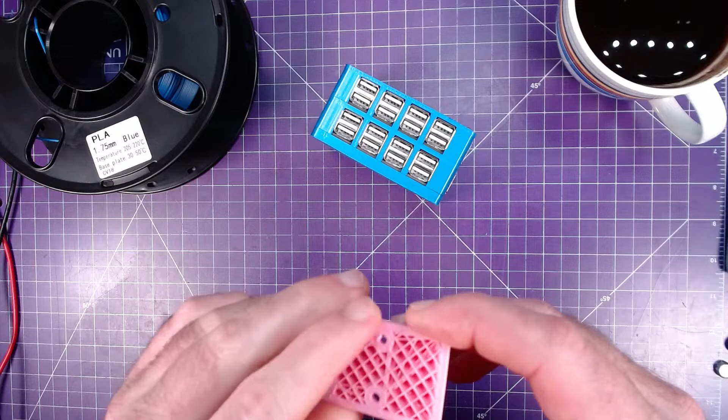So this is the kind of stuff I've been printing. This is a failed print. As you can see, it came off the bed a little bit, see a little ramp? But this kind of stuff—if you have a guess as to what it is, let me know. It is rock solid, can't break that.

Actually, I guess I could show you a completed print. So here's a completed print using this pink PLA.

Funny story, this pink PLA comes from an Amazon listing. I think it was $18 for a kilogram of pink and a kilogram of purple. I guess because, you know, 3D printing skews male. So I got four boxes of PLA, four kilograms of PLA, for under 40 bucks.

What's this, PLA purple? So this stuff and this color too—pink and purple. It's just now occurring to me that purple is kind of the channel color, so for something that's going to be featured on the channel so prominently in the future, I probably should have printed it in purple.

Well, now I'll know. Not tonight though—already released one video, haven't recorded any more. Oh yeah, tell me about not recording enough videos. That's been my life recently.

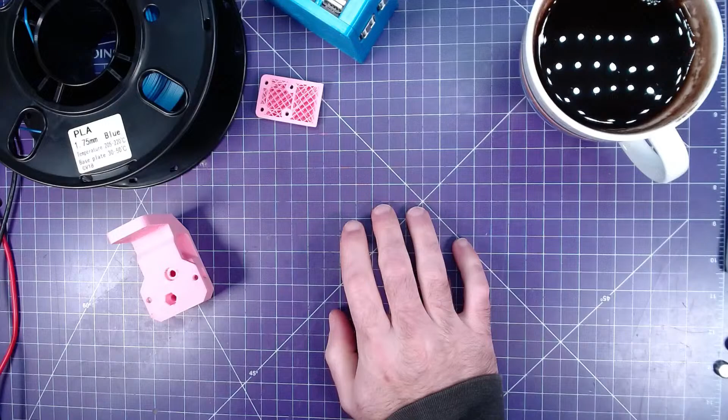I'm basically doing a lot of work for school. I'm getting some PCBWay videos done so I can pay mortgage, and doing podcasts because I have a self-imposed schedule every two weeks. So yeah, that's pretty much that.

I do want to show you guys something, I'm going to go upstairs for a moment. Let's see, hang on a second. Remember this from last time? Well, be right back, I'm going to put this here.

Working on a website—oh, very nice, I need to put more work into my website. Everyone's going to be able to hear me, but I'm just going to be upstairs grabbing something to show off a little bit. So, going up. Here we go, thankfully it's not far. I've been meaning to do a video on this for a little while, but I have not, quite obviously.

All right, we're back. So this is a Tupperware. Actually, I can probably demonstrate, except I'm not happy about one aspect—no, I won't demonstrate. Okay, so this is a battery maintainer that I designed, and by designed, you'll see how simple it is.

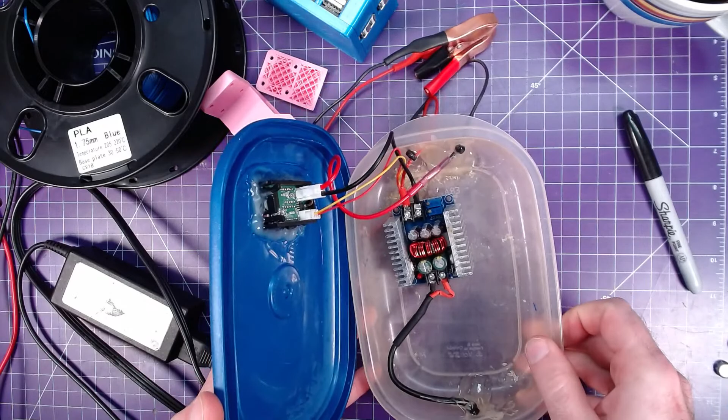I just have to be careful when I open this because I think there's wires connecting this to the rest of it. Yes, so here we go. So inside, all it is, is this DC to DC converter, and it's powered by a laptop charger.

Basically, you just have this one off-the-shelf volt and current meter, and this DC-DC converter, and I've set it to like 13.5 or 14.2 volts. You plug this into a lead-acid battery, plug this into the wall, and it maxes out, I think, at 2 amps. So it'll maintain your battery when it's like super cold outside.

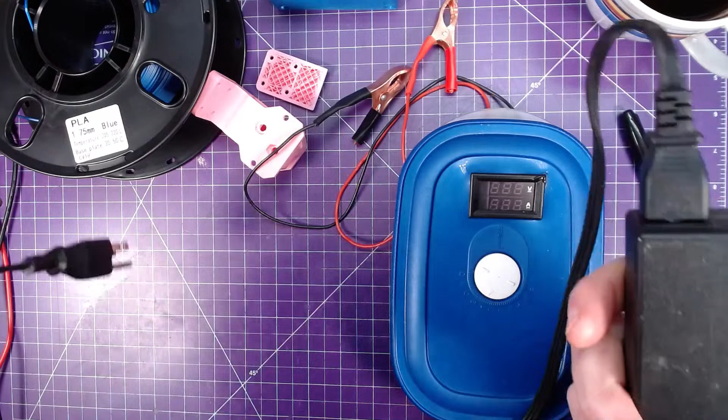But yeah, these laptop chargers—you pay very little money, they're already CSA approved and whatever. You could probably find one in the trash or on used markets like Facebook Marketplace or Kijiji fairly easily. Plug this into the wall, this gives you 19 volts at 3.42 amps, and this I've limited to, I think, 2 amps. Basically at 2 amps, you can leave a lead-acid battery on charge forever and it won't damage it.

So yeah, this is my solution.

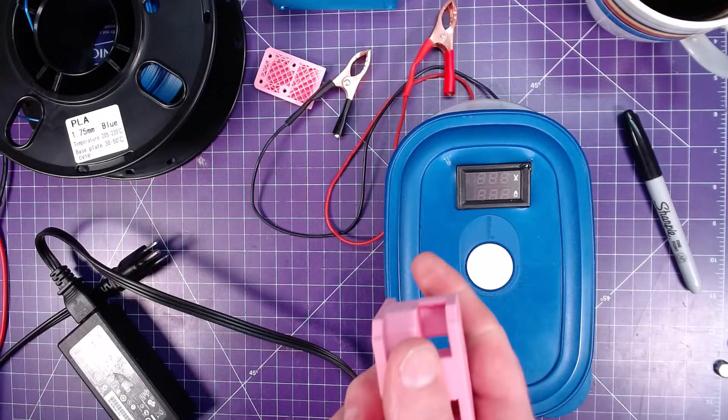Again, if you hear noises behind me, it's because I'm 3D printing stuff, and my most reliable 3D printer is also my loudest one. So it is what it is. Yeah, the case is not 3D printed. That's why I might do some CAD today to design the case. I also want to add a switch too.

I don't know if you know, but if you plug in a circuit that has capacitors—so here, you see there's these output capacitors here on this module—if you plug in a circuit with capacitors onto a lead-acid battery, it will spark. And an automotive lead-acid battery is not sealed.

In fact, let me go grab one and I'll show you what I mean. And the problem is if you discharge a lead-acid battery by using it. So like, let's say you have a parasitic discharge in your car, and that's why you need to charge it up with a battery maintainer. Well, you're creating hydrogen gas. There we go.

Typical car battery, this one's from my Civic a couple cars ago. But right here, there, and there are vents. And so if you plug this in, positive and negative, and it sparks—which it will if there's capacitors—then you can light any hydrogen gas that is venting.

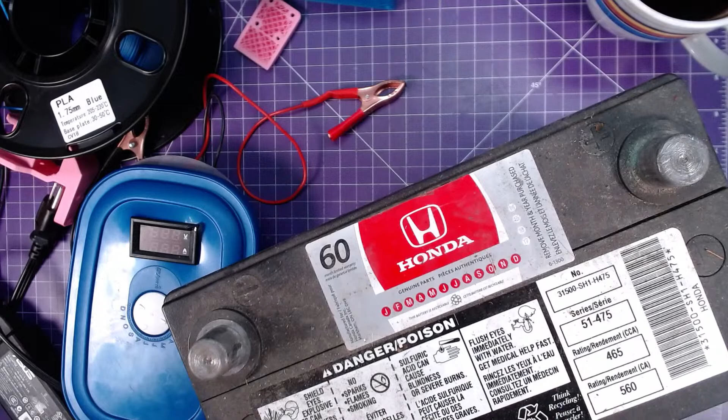I have a request triggered by my podcast. Sure, shoot your request, I'll listen and maybe I'll take it in notes, who knows. So everything that plugs into a lead-acid battery that has capacitors on it or outputs a current or whatever should have an on-off switch, and you should have to plug it in and then flip the switch. So that's another design improvement I need to do here.

Can you control a fuel injector using ESP32? Indeed, you can. In fact, ESP32 might be strong overkill. You could probably do it with really crap microcontrollers. You could probably do it with like a PIC, you know, an early PIC.

Hang on, I'll see if I have an injector here. Basically, a typical injector pulse is somewhere between 2 and 20 milliseconds. It's not particularly fast. Oh, and my box of goodies has moved. No, I won't be able to dig out a fuel injector right now. Unless it's over here. No. No digging out fuel injectors. But yes, you can definitely control a fuel injector.

Yeah, open. Yes, I am alive. I'm a little bit out of breath going up and down the stairs, but yes.

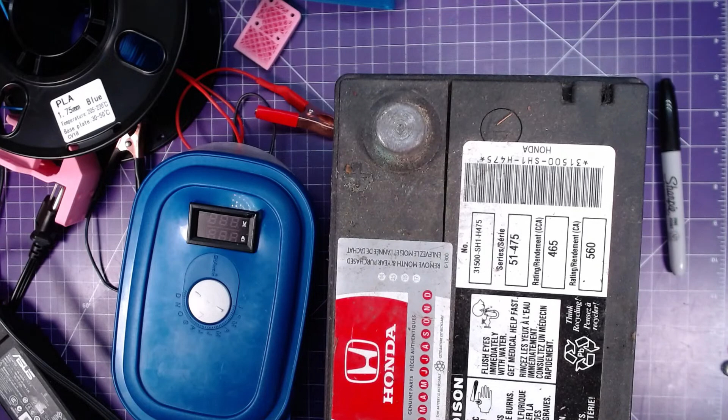Yeah, OpenSCAD is very like, you know, it's like you have to do math. I'm not an OpenSCAD guy. OpenSCAD is painful when you try something not trivial. Yeah, I agree. Yeah, you know, good on people for having OpenSCAD skills. That ain't me, that's definitely not me.

Did you release a video today, Vero? Everyone who doesn't know, Vero is my lovely wife, and she has released—she has a reaction channel.

You requested a topic in the podcast, and well, a fuel injector guide is my personal request. Oh, it's your week off. Okay, fair enough. I'm going to take note of that, how fuel injectors are controlled. The only problem is there are two different control schemes to a fuel injector, and I only really know how to do one of the two.

Like, the schemes are simple, but the programming is a bit more complex. One requires you just pulse the injector on. It's called saturation mode. You just pulse it on and you pulse it off. That's the way basic stuff works. But your injector needs a specific resistance, or you need to add a resistance in series with your injector.

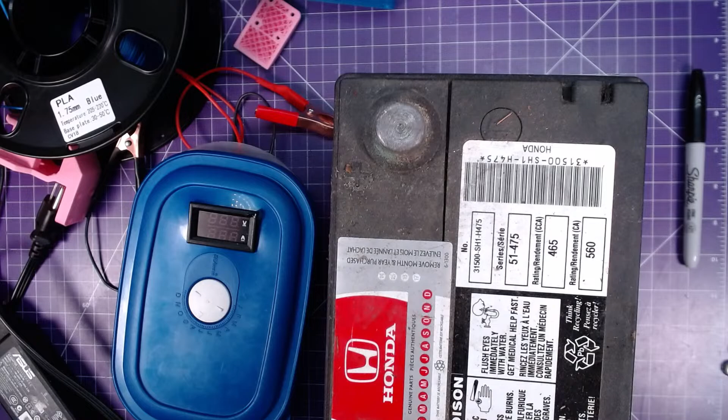So it's full of sawdust because it's in my dirty side shop. Give me a second here. And here.

So there's a carburetor, that's a very small carburetor. This is for a 3.3 cc engine. So a 3.3 milliliter, right?

Cubic centimeter. No, that doesn't make sense. Whatever, tiny little engine. So here's the throat that goes into the engine.

I need a black background, hang on a sec, to make the camera deal with the exposure. Like that.

No. No. How's it going, Franco? Is this blacker? That's pretty black, okay.

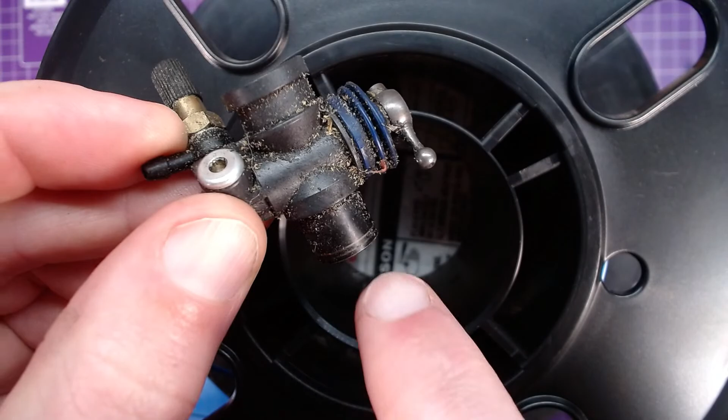So yeah, here's your carburetor. This is the engine side on that side. And this is where the air filter would sit on top here. Fuel comes into this pipe here, this guy right here.

And then here is the needle valve. I believe this one here, if you turn this whole assembly, that's just more fuel or less fuel. And then if you turn just the slotted part, that's to adjust more or less fuel at idle.

And if you look on the inside, if I slide this, that little cylinder comes out of the way, and there's a little needle inside there to feed the fuel. Very hard to see because the lights aren't lined up with the camera, but there you can see right through.

So there we go. So basically you just slide this open to allow more air, and the higher airspeed should suck more fuel into it too.

So in order to choke an engine to make it more rich, have more fuel, make it easier to start, you can just partially obscure the opening here and crank the engine, and because it can't suck so much out of this section, it'll just suck fuel directly through in here.

Because there's no fuel pump on this specific two-stroke, although most two-strokes do have a fuel pump, this one actually just uses exhaust gases run back into the fuel tank in order to push more fuel in.

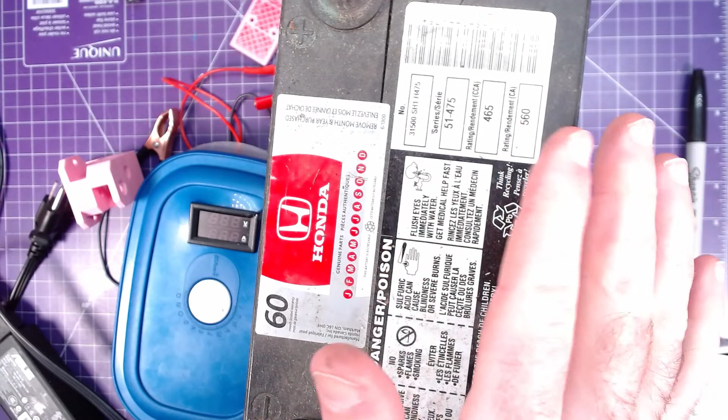But I want to convert it from carburetion to fuel injection, and I think it would be really cool. Instead of the point system, I would go completely electronic ignition, and then after that go electronic port fuel injection as well. That would be really cool.

Apparently, the only difference between my 9.5 horsepower and the next model up to 15 horsepower is the size of the carburetor. And so if you do fuel injection, then you can just increase the pulse width of the injector, and then you'll be doing the exact same thing as a carb. You'd be giving it more fuel, and then away it goes.

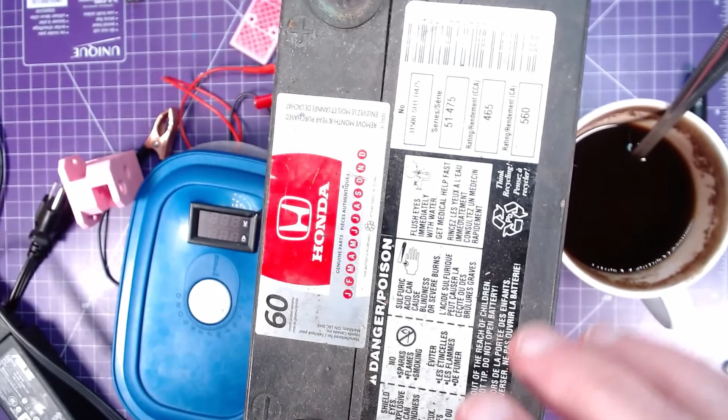Whoops, knocked the camera there. So yeah,

So this is one of the options we can do today. We can model an actual case for this prototype. We can talk about 3D printers and stuff, how mine bit the dust this week trying to print parts.

Look, the nozzle ate.

Let me see if I can show this properly. The nozzle dug a hole in the bed, and it's so bad that it went through the magnetic part. So the magnetic part on the bed needs to be replaced too now. I don't know if the aluminum is damaged underneath, but I hope not.

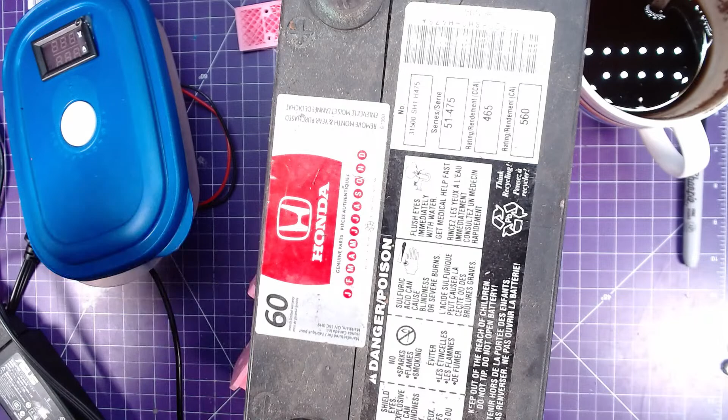A motorbike had a carb like that, 90 cc. Well, this carburetor is for a 3.3 cc. In fact, I might have the engine kicking around somewhere. Let me bring this back and I'll look for the engine while I'm there.

Oh, this battery must weigh about 40 pounds. It's pretty crazy when you realize a lead acid battery is literally filled with lead and acid. Mostly lead, by weight at least.

Let's see, where would I have put that engine? There, because I have a scrap engine, and one that's still in the RC car.

Not in here. These nitromethane engines are so picky that it's quite easy to blow them up. Plus, they rev super high. They must rev at, I don't know, 40,000 RPM, something like that. Nope.

One thing I miss is having an RC car, but I don't really want to spend money on the name brand RC cars. They're so expensive. Oh, here's the head. Well, I have the cooling head. I don't know about the rest, I feel like I may have thrown it away. I do have a different one.

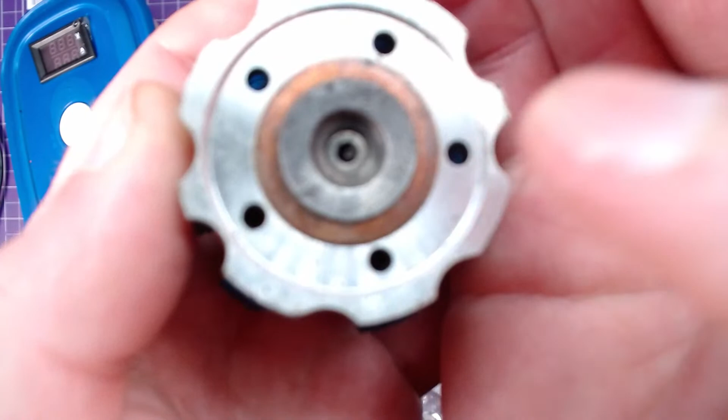Okay, so this is the cooling head from one of those 3.3 cc nitro engines. In the very middle there, you can see the glow plug. Maybe you can't because of the focus. Focus, there we go. In the very middle there, you can see a little filament that lights the nitromethane.

Here is the cylinder block and crankcase. I'm trying to think, maybe it's a 1.6 cc. I'm not sure. Maybe you can see a little piston in there, going up and down.

Here's the back portion. So there you can see the counterweight on the crankshaft and the connecting rod. That connecting rod connects to the piston. And then here is the cooling head for that one. No glow plug in this one.

So there we go, and then you've got the flywheel, which is relatively heavy. The flywheel would hook up, pretty sure, over here. Probably. I don't think it goes on the back, I think it goes in the front. This way? No, it can't be this way. It must be this way. Feels like something's missing in the middle here.

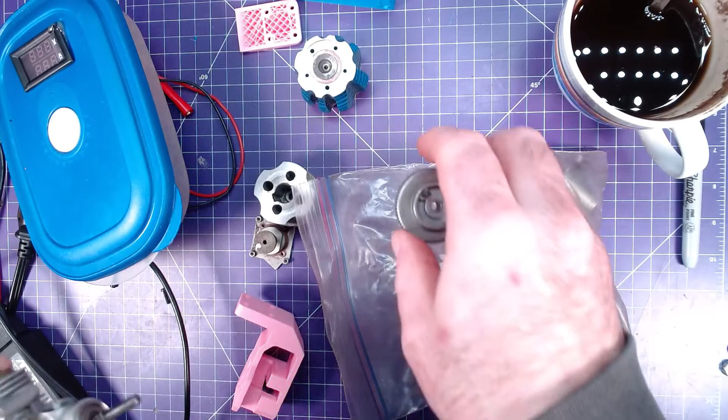Oh yeah, here's the other end of the crankshaft. So that little slot there hooks into the little end of the pin there. Sorry about the knocked camera. Focus, there we go. See a little pin at the end there. So that pin hooks up into this little spline here.

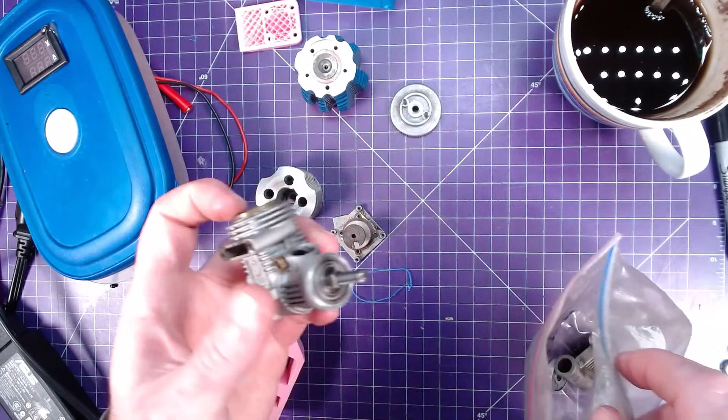I basically stopped playing with gas-powered RC cars because I just can't afford it. Everything is so expensive. There's the exhaust. It's just way too expensive a hobby. And they honestly don't run great. They don't have feedback, they're not like a car. When something goes wrong, the computer puts on a check engine light. Oh, there's a throat for the carb.

The engine doesn't throw up a check engine light and start running like a bag of poo where you can just limp it home, check the codes, and go after whatever sensor is freaking out or whatever the engine's doing mechanically. It's really like when it goes, it just blows up everything, and then you have to replace parts.

Like an ATV engine, the parts in that engine are roughly the same price as these nitromethane engines. A piston for this thing would probably cost like 60 some bucks, whereas you can get a nice aftermarket piston for an ATV for 60 some bucks. The cylinder head, this part here, is probably over 100 bucks. So it was just way too expensive.

It was lots of fun while it lasted, but I'm pretty sure the one that's in my RC truck right now is blown too, and it's just been years. It's just been sitting there because it's way too expensive to fix, and to buy a whole new engine is like $400 or $500. It's too much.

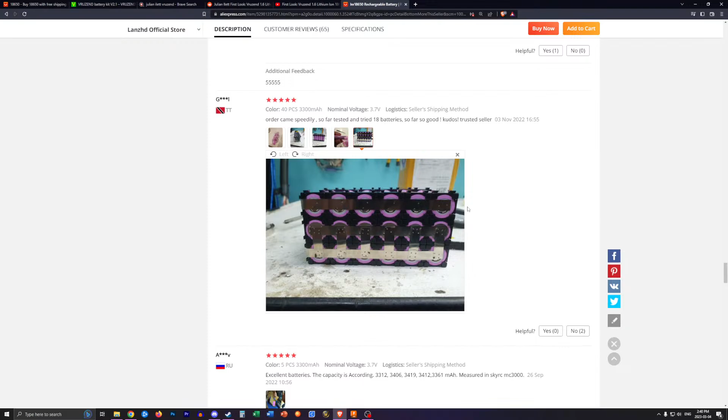What about balancing? Because everything's bolted together, I can get 3-cell BMSs and put them together, and you can unbolt the BMS and get, say, a 60-volt BMS—here, let me show you.

Let me show you, a 2000 watt motor, like this one here, VEVOR. There we go, a bigger one. Yeah, this guy—look, I can get a 48 volt, or I could get a 72 volt, depends on what I'm willing to spend.

I can reconfigure those 12 volt packs with relatively cheap battery management systems—just unbolt the BMS and bolt it to a 72 volt battery management system. So that's kind of what I'm saying: I can run a whole bunch of packs individually stacked here in the workspace, and then easily reconfigure them to be 72 volts or 48 volts, no matter what.

What's nice about that is the same cells can go with me. The other option is lithium iron phosphate batteries, which I am totally for. I wanted them, but the thing is they're only really a good deal in 100 or 200 amp hour configurations. And if I want 72 volts at 100 amp hours, that's going to be a massive, huge pack, and it's going to be so expensive - like $3,000. And I'm not looking to spend $3,000.

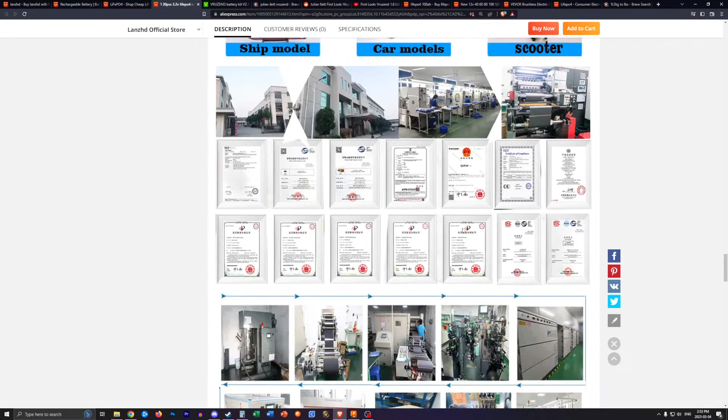All fine over there. Because yeah, this would be pretty neat, I'd be down with that. That'd be freaking dangerous to ship this though. Let's see how people got them. Nope, no feedback, nobody bought them. Or nobody - usually you can see how many were ordered. Let's see if anyone bought these. One order.

Yeah, these are fancy. Oh, okay, no damage - both banks 3.28 volts. So it's shipped in a plastic container with tape over the tabs. God, I wish I could reach out and ask them, but it's gonna be a big fat no for sure. 300 bucks. One day, you know.

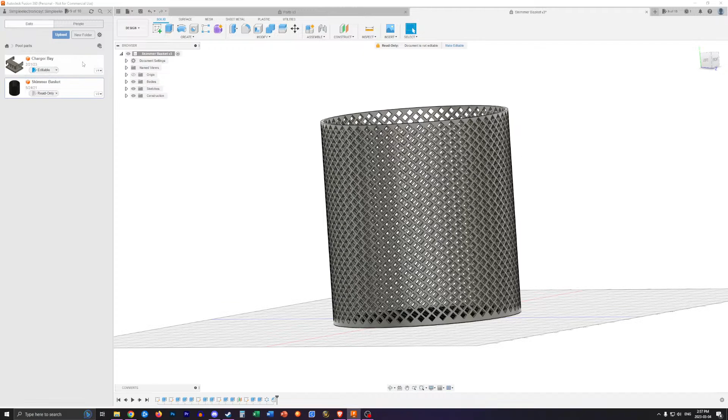Charger bay, is that separate? Yeah, midsection bottom. This is for the video that should be coming out tomorrow.

I actually don't know where I put all my stuff. Maybe it's gone. Maybe it's in the snow speeder. I don't know.

These are the new ski designs. Component 2 - oh, that was the old ski.

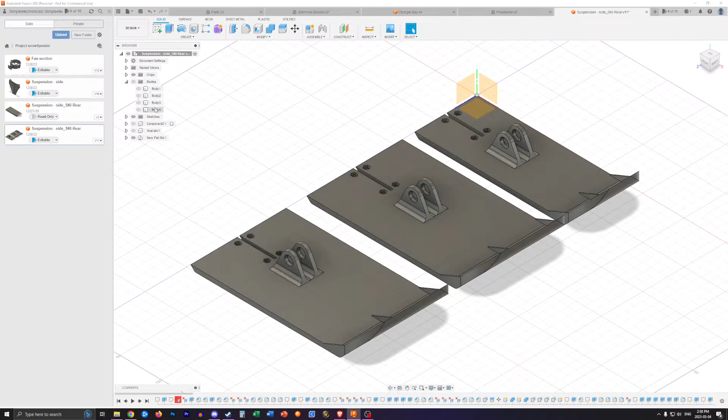Bodies. I have no idea. It'll be version 2? Version 2, I think.

This is where all my parts are for the snow speeder. Oh yeah, this is the giant duct that I made for a big motor, split in 4.

I don't actually know where all the stuff is. Oh.

Yep, this is all designed by me for 3D printing. Actually, here's a good question - where's my OpenRC project? Oh, I was looking down here. I have all these things. Whoopsies.

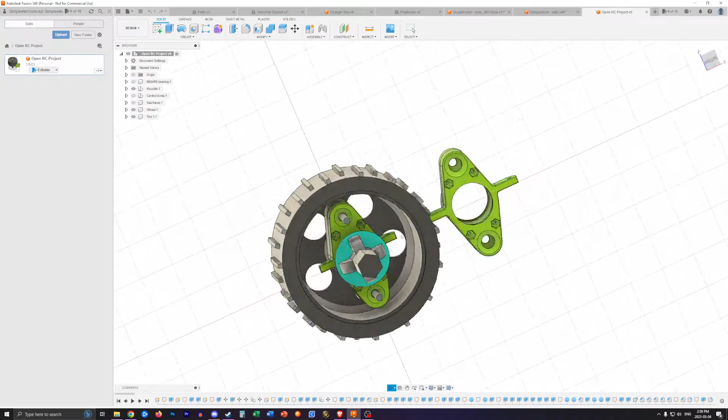OpenRC project is here. I think Thomas, you're pretty new here - this was my project to make a fully 3D printable RC car. Still working on it, mind you. It's not even close to being done.

It's editable, 2020 parts. I got a lot of stuff.

My LED - that's a PCBWay project that I haven't filmed yet. It's done, but it's not filmed.

Oh, does this not have anything? Oh, well, it's nothing. LED? LED's nuts. This is my humor.

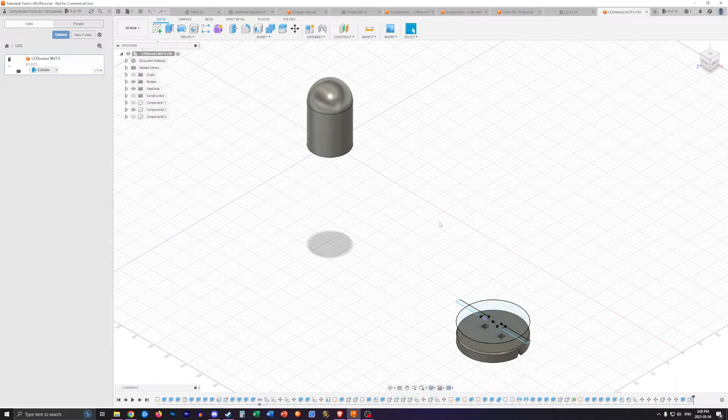Oh, actually, I disagree - Fusion 360 is actually fairly simple to use. I find this much easier than OpenSCAD. It's very, very visual.

Missing some bodies here. There's like the macro pad holder.

I don't know what the duct was. Well, that's definitely not a duct. This is for the banana box. That's not that.

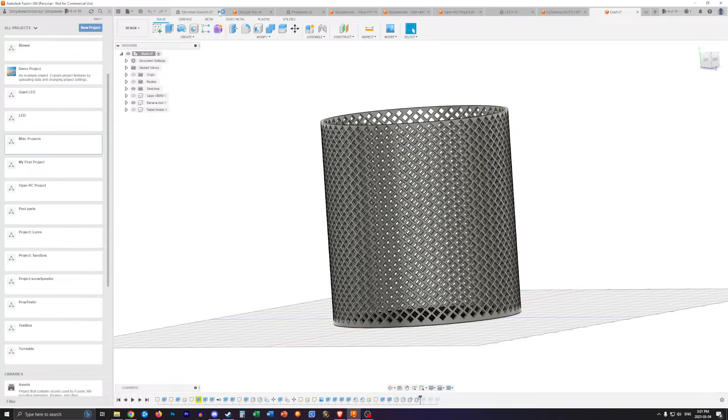Fusion 360 is free to use. I would highly recommend you download it and try it, but I find OpenSCAD very difficult. I find FreeCAD very difficult to use. I should probably install the latest FreeCAD and try it out.

I do want to switch away from Fusion 360 because it's bothering me that they just keep updating everything, and every update they just remove a little bit more functionality. FreeCAD is the opposite - they're constantly adding stuff in, so I should probably just install the latest FreeCAD.

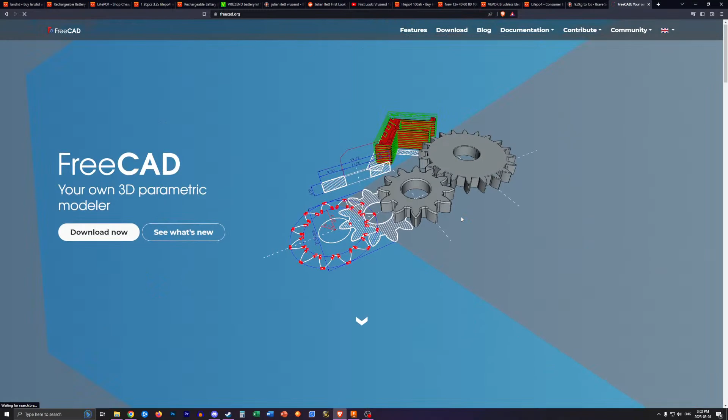Yeah, FreeCAD is much harder. In fact, I'm going to try it right now. I'm going to flip you guys to the webcam so you can take a look at other things while I install FreeCAD.

The moment that FreeCAD has me make an account, though, I'm out. The whole reason is so that I don't have to make accounts.

Well, let's see if we can figure it out. The thing with FreeCAD is their social media presence is pretty strong. I think you could just complain to them on social media, and they're gonna be like, 'Oh, you can suggest stuff.' They're still in freaking beta.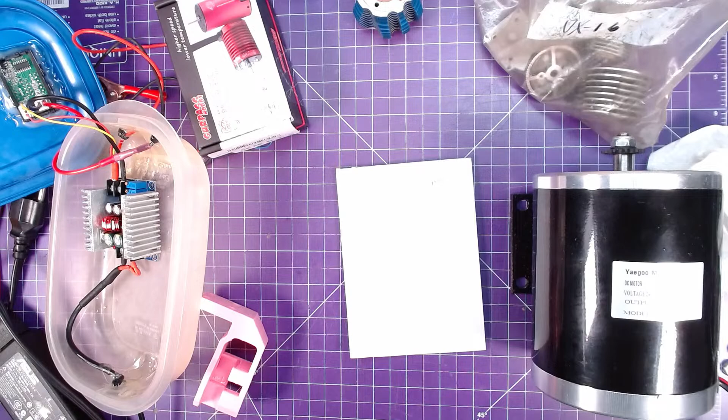All right, so what was it? Power and regulators. In the power/regulators bin.

Oh, what kind of dog do you have, Adam?

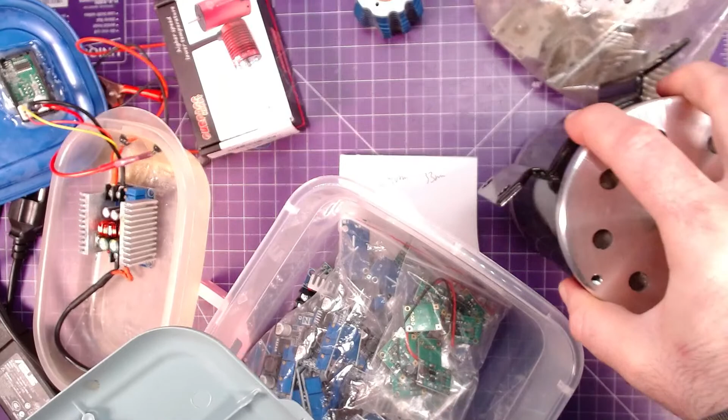A bracket for that big electric motor. Well, it has a bracket - see, down there. What I would need is to adapt it to a bracket to fit my outboard. I don't have my outboard in the house, and it just snowed 20 centimeters, so I'm not going outside today. I'm gonna go shovel when the whole crap show is over tomorrow. So I like your thinking, but I'm not going outside today to pick up the motor. Although it would be funny for you guys listening to my struggle.

Which view to start? It's not Blender, but it comes close. Yeah, I get you. I need to do a tutorial series. I did a tutorial series on KiCad, but I can do another one. And I do need to learn FreeCAD enough to do a tutorial.

Okay, so what do we have for width? So it will be 45.3. So that is not part of this. So 45.3 by... oops, that was already this. So it's not 45.3. Oh, it is. What's going on here? Yeah, 45.3. And this side. Tough part is lining it up by 60.

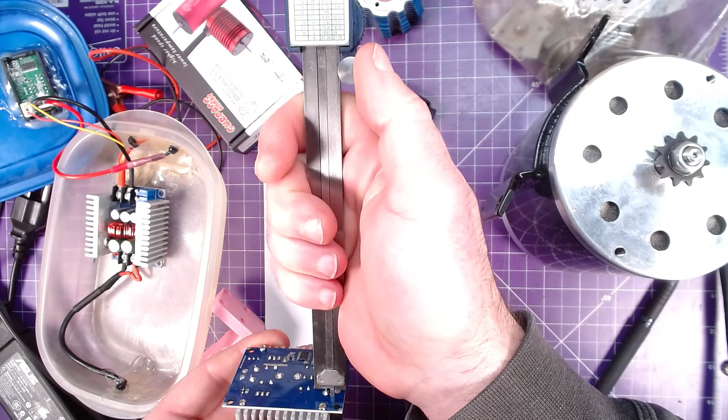Okay, so that's for the base. I need it a depth to clear the components, somewhere around 2 mils, probably more. Let's see, about 3 mils. Then about, let's go 4 mils. Give it some breathing space down there.

And then what we need, our overall case needs to be bigger. So at least 53, and then room for the cords. So let's say 75. So let's go 55 by 75.

And then we need the overall height. If we add those 3 mils, probably we need enough space to clear it. Let's give it a good, go 50 mils. Oops, 50 millimeters, there we go. So let's try that, try to build a case for this.

We can do center to center bolt pattern here: 330. So 50 mils plus 3.3, so that's 53.3 by 36.56, and that'll be the hole sizes. Oh, and then 3.3 holes. All right, that should be enough basic measurements to get us started.

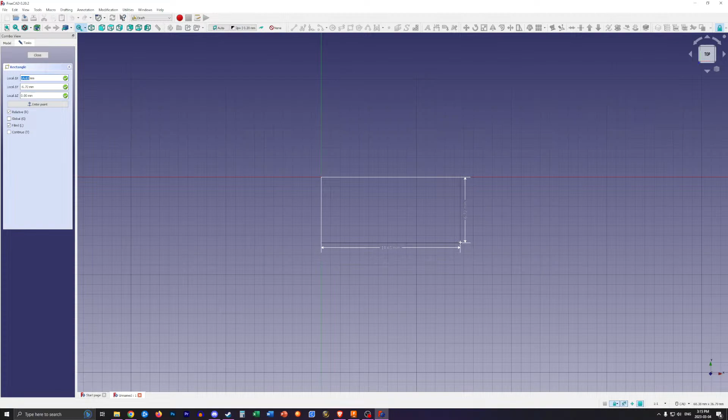Okay, so let's snap to dimensions, probably. Snap dimensions, okay, let's try that. All right, so make a rectangle, snap to the origin. Okay, I like it, so 57 by 77. And now, no, it's not snapping. 57 by 77, enter. No. Okay, how about if we finish it and then we edit it?

Rectangle, yeah? Yes, there's a rectangle. Height 57, right? 57 by 77. I don't know what the hell happened there. Why is this so big? Okay, whatever had snapped doesn't snap anymore. Can you move this?

Had to provide the wrong measurements this week for a stair lift. Who in their sane mind doesn't use metric standard for measurements in the UK?

Yeah, construction here is very much standard as well, imperial, I should say.

Okay, why? What is going on? Okay, well, anyway, didn't I snap to origin? I thought it snapped to the grid. Is this on the origin? That's not even, that's not anywhere.

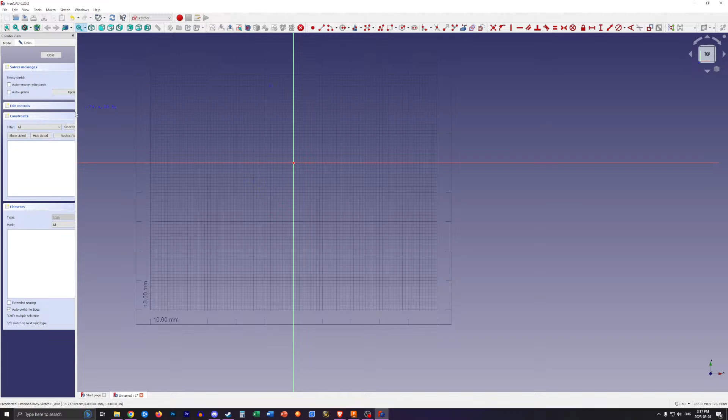It's getting warm now, it's getting warmer. All right, snap this to the origin, right? Do we have snapping again? So now my question is, why wouldn't I have the same snapping options when I'm working on a sketch?

Why, Windows? No. Constraints? Not constraints, I want snapping. Tools. Okay. I found the snapping in one workspace, but there's no snapping in this other workspace.

I just go there? Okay. Can I tab? Oh, come on. Really? Okay, so I've got these. Can I? What is going on here?

Can I edit this? Edit. Okay. Normal. Good. Length constraint. Okay, all right, here we go.

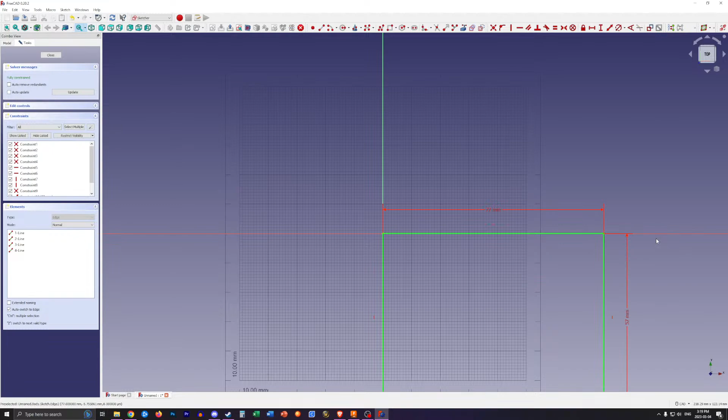Okay, so we got a rectangle. Yeah, you're telling me. So here we are. How long has it been now? 20 minutes, and we have a rectangle.

Phenomenal. Okay, close. Uh-oh, no. Bring me back to the sketch. Oh, mofo. Sketcher, model, sketch, oh sketch. Okay, we're back in the sketch. All right, one more. Oh, all right.

So if I want 2 millimeter walls, oh, I have no snapping. Snap to there. There, okay, just gonna make it like this. Okay.

This, D, no, K, no. How do you... K, right click, no, so what? 6th line, K, no, D. Oh, D, okay.

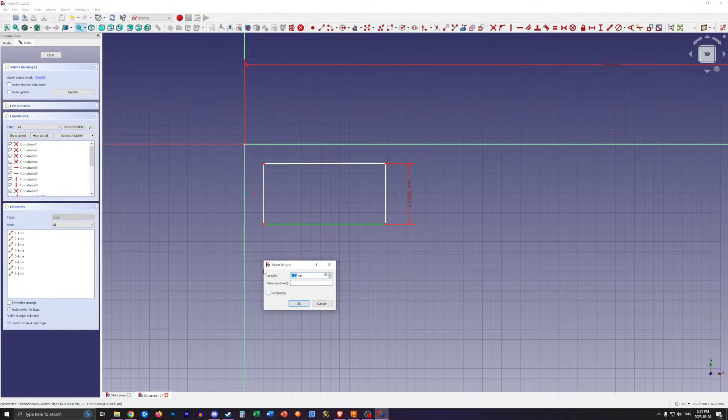Yeah, this is difficult. I mean, there's a massive learning curve, but the thing is, I am relatively proficient in Fusion, and like, look how lost I am in this.

All right, what length was this again that I wanted? This was 55... 55, no, oh, I didn't stay in the corner. Why? Why wouldn't you just let me pop it there? Oh, you bastard. All right.

Okay, all right. Now let's see what happens if I make a line between this and this. No, I want exactly, can I not snap to 90 degrees? Okay, line, I can change this to a construction line. Oh, all, you change this to, how do you convert it to a construction line?

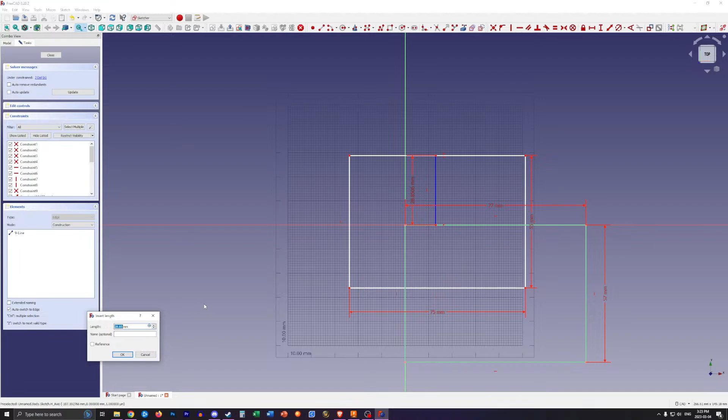Length constraint, see it says K or D, but whatever. All right, 2 millimeters, actually it'll be negative 2 millimeters. Okay, fine. Length, 2 millimeters, okay, so that worked.

But now it's above, I want it below. Why can't I say other? Okay, whatever, okay, line. Can I just convert it to whatever? Okay, from this to this, I want exactly 180 degrees.

All right, good. To convert this to construction. Okay, all right, good. Length constraint, 2 millimeters.

Okay, so now, good, but how do we, if I can't do a negative constraint, then how do we... can draw by hand faster. Yeah. This is not, folks, this is not going well.

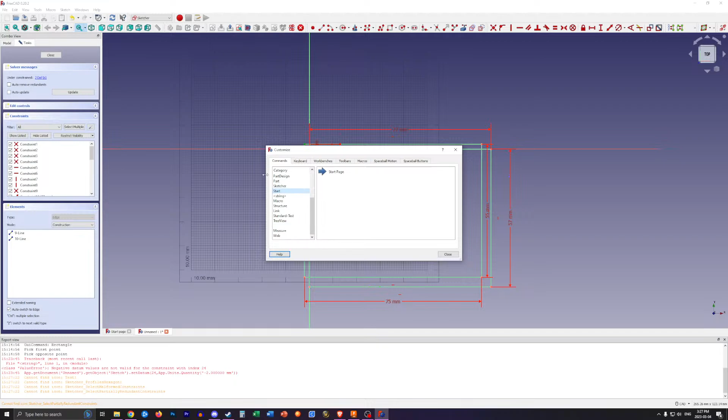Can we just... so I can't do this negative. Can I?

Okay, maybe it's not aligned. Hold on a sec here. Maybe I can just delete this, and like delete this, because maybe that's not what I need. I need to just space these apart. So it's like this and this.

Can I make it? Oh my God. This? No, what are you doing? Okay, which line? Okay, 8 line. Let's go horizontal distance. To what though? Let's say -2 millimeters. Okay. Yeah, okay.

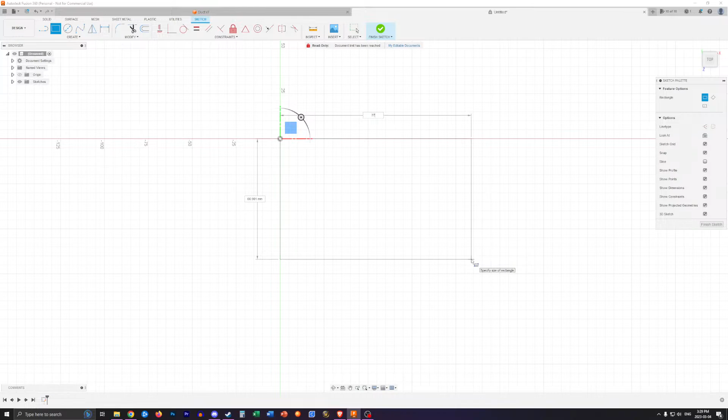So I wanted this to be 77 by 57, like so, and then I can make another one. Even zoom in, can go 2 mils in, and that would be 75 by 55.

Oh, that's not 2 millimeter walls. Okay, see I made a mistake. So 70, 7, 8, 9, 79 by 59. And then 55, yeah, so that's good.

We can actually add a constraint if we want to. Inspect. No, actually, you could just do this. So look, X. From this line to this line. And then that's good. Oops. Go back to your sketch.

You can actually sketch dimensions if you want to, but it's not actually necessary. We're not turning anything. All right, so that's the full length. Now we need to hold the board, which is 45.3 by 60. So let's just make a center line here as a construction line.

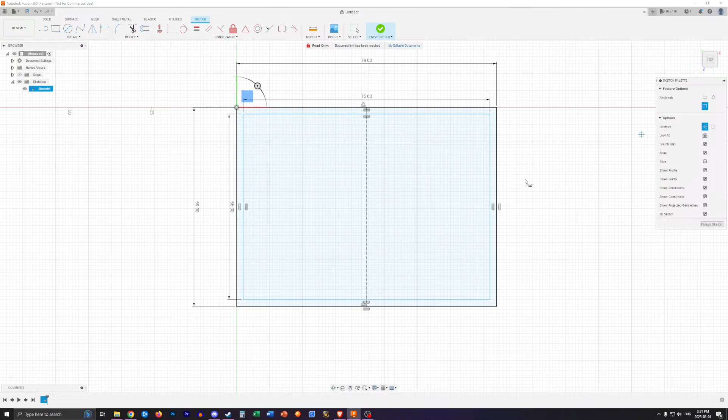Construction line, there, there. Then we get a 2-point rectangle right in the middle. And we want this to be 45.3 by 60. Oops, that would be 60 by 45.3. So that is the height, that's the actual size of the board, and it's pretty well centered.

So that's good. And then we can add little dimples on it after. Do we want to round the corners? Sure, why not? Let's just round the corners. Whoops, not that. This. Add a fillet here. Let's say about 1.5. That's good. So there, and there, and there, and there, and there, and there, and there. I think that's pretty good.

Let's finish this sketch. Now we're going to grab everything, this and this, and we're going to extrude it up, let's say 2 mils to have a nice thick base. Bring back the sketch. Grab this thing and bring it up. Extrude 2 mils plus 4, 6 mils.

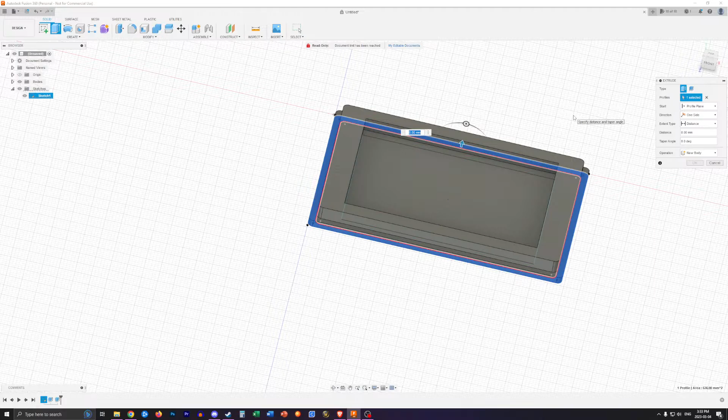And we're going to join like so, and then we're going to grab this and we're going to extrude 2 mils plus 6 mils plus 50, so that's 58. So we're going to go 58, and we're going to join it. Okay, and here we have the basic box shape already that the thing's going to sit in.

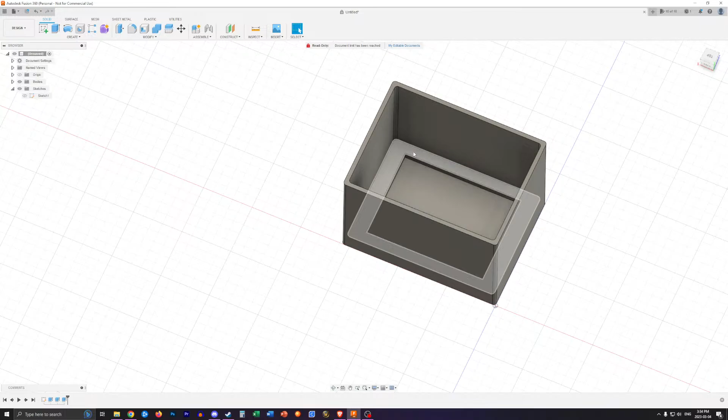So that doesn't take long at all to do. And then we can even hook underneath the holes if we really want to. But yeah, this is super simple as compared to FreeCAD, and you can see it's like freaking seconds. It's literally 5 minutes to get this far, and all I have to do now is finick with little things to prop up the board, little screw holes, or probably just clips to clip it in. We make little holes on the side by making sketches on the sides. This is just super simple stuff.

So let's make little clips then. So we can clip onto the PCB. We can clip them like in the corners here. We'll just have them clip into the corners. So let's make a sketch here. So let's create a sketch on this. And let's make a little bit of an extrusion from here.

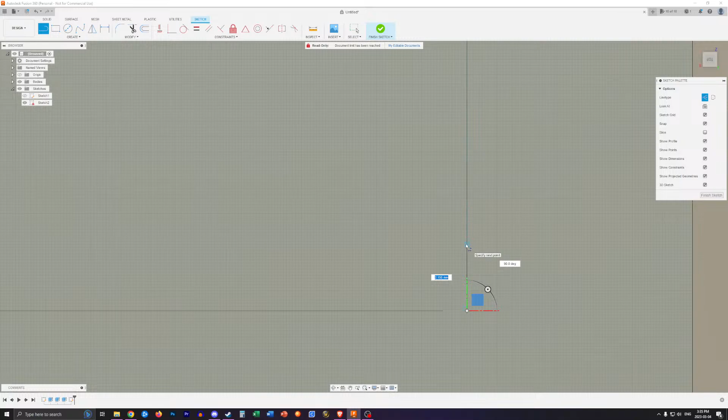So let's say, it doesn't have to be super big, maybe like 6 millimeters in each direction. So let's say 6, like so. That doesn't have to be a construction line. And 6, like so, and then have these come out maybe like 3 millimeters, like so, and then have this come out 3 millimeters, like so, and then, yeah, like so. Whoops, did I make a mistake here? 6 and 6, 3 and 3.

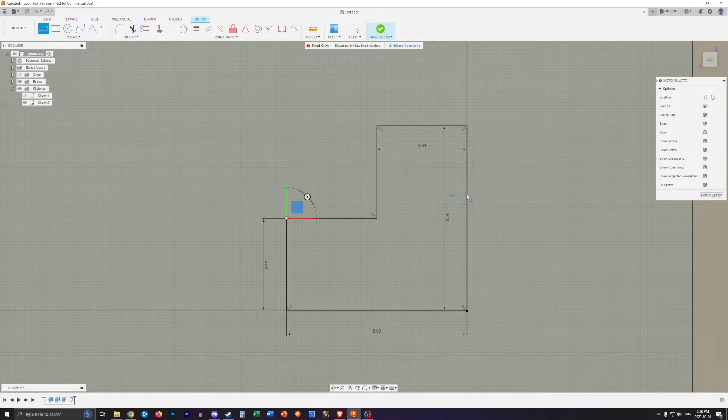No, I think it's equal. I think what you're seeing is that these things being inside makes it a little hard to see it's symmetrical. It's definitely symmetrical. Okay, now we're going to grab a line.

And this can be a construction line, to there, and there, to there, and then we can mirror the part. Grab all this part, mirror line here and here. Do you not mirror both? No, just one. Okay, mirrored.

Then grab this part again, and this part, and then mirror. Grab the mirror line to be there. Okay, and now we got our parts. Finish the sketch. Grab these two.

Extrude. Let's go -1. There we go. So that's done.

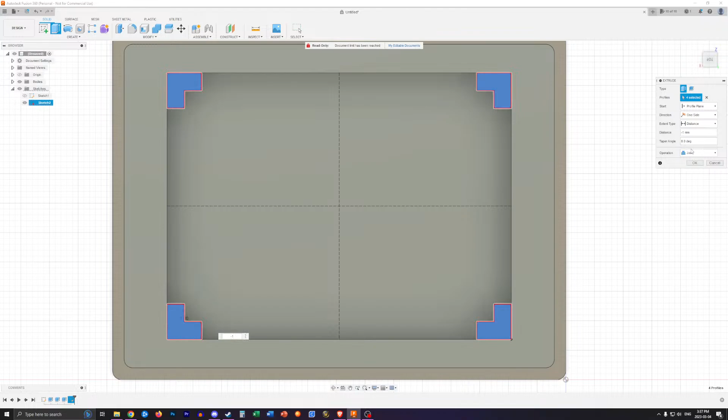And then grab the bottoms. That's going to be hard to do. You fell asleep, that's not good. And I know there's a way to view this as a wire mesh.

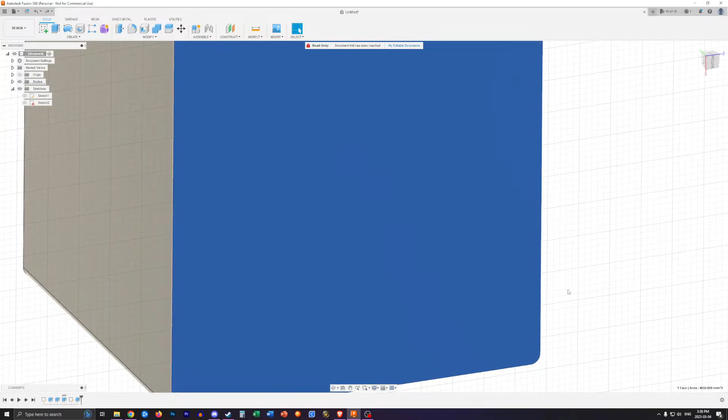That's the whole body. But what I usually do, because I'm lazy, I just take this and then just extrude it away and then come back to it later.

And then if I press pull the corners, no. Where's the... oh, there it is. There we go. So the 3D printer will be able to print that at a 45-degree angle.

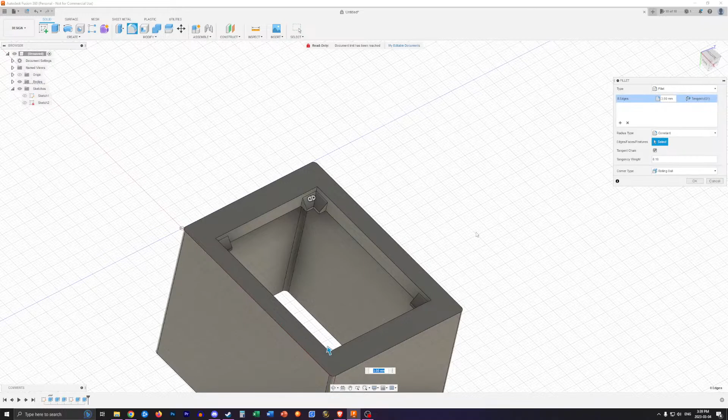So that's good. And then we'll get the sketch back, grab this and extrude 2 mils. There we go. That's back in place. Get rid of that.

Oops. There we go. So that'll sit on that. And now we just need little clips around the edges, and then that's going to hold our box in.

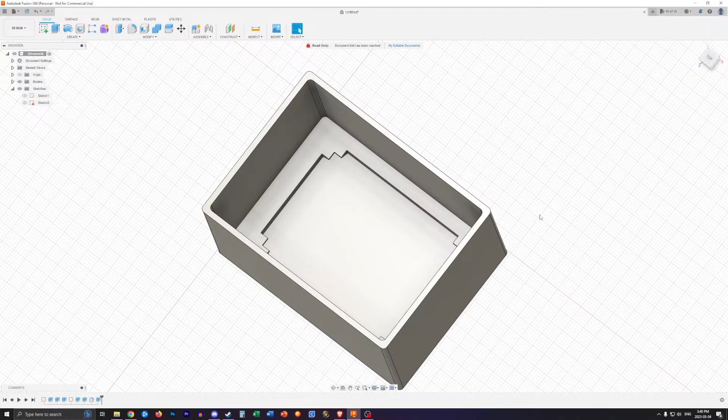Oh yeah, I'm designing a 3D printed case for a battery maintainer, which nearly anybody should be able to build for themselves, which is great. Tired of seeing people with, you know, batteries that are dead on their cars.

And then clip to the sides. I don't want to make clips. Maybe I won't even bother making clips. Maybe I'll... yeah. Maybe I will.

So where do I clip now? Because I kind of wanted it to be here. Make a sketch, grab this guy.

And let's make ourselves our rectangle, 2-point rectangle with the center dot. Go right in the middle. And then center here. There. And then here. Should be able to grab both those. Yeah, there we go. There's my rectangle, and then I can make the clips go here.

Some way of storing the cables. Storing the cables I can build on the outside, so that's not a bad idea. Leaking tire with 3D print. No, I don't think so. Not that I know of.

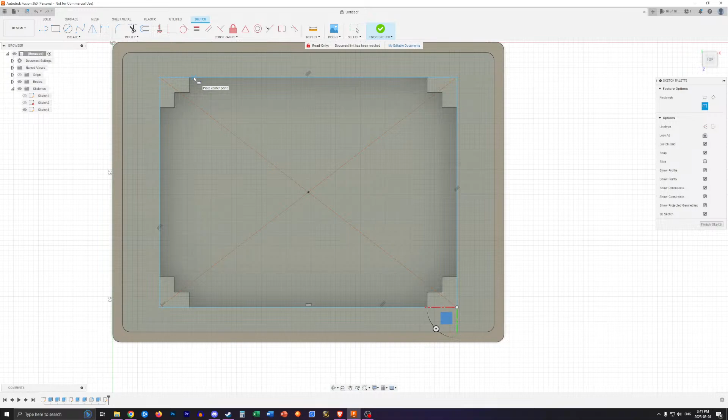Okay, and now I need to design something that's relatively weak that will hang on to the edge of the board. So let's see. Maybe... actually, I don't know if it has to be super weak. We'll have to figure it out.

So let's make, let's say, that. And then really this to be 1.35. I don't remember how big this other one was. Well, and it's 2 mils from the corner.

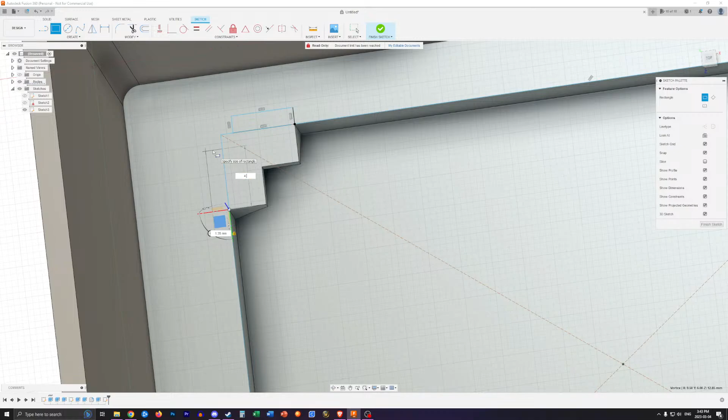So, 4.8. Sure. All right, so we got these. Oh, excuse me.

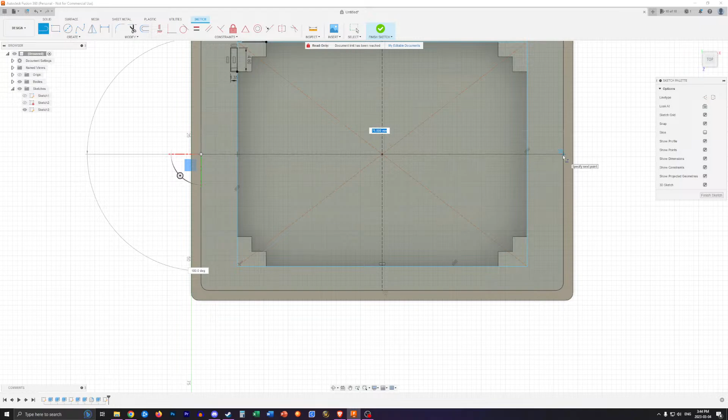All right, and check the top again. Grab these two. And then, oh yeah, I should probably make some mirroring lines. Here to here, make that a construction line, and then here to... oops, I should have actually made it from the outside. Here to here, make that a construction line. So grab this, and then mirror them over, oops, select. Mirror them over this way.

Put the side going flat on top. Oh yeah, that makes sense. Cannonball Run was named after the man who set the first record for the Cannonball Run. Interesting.

So that, and then grab the same geometry and this, and then mirror to there. Okay. Finish sketch. And now I want to extrude these up.

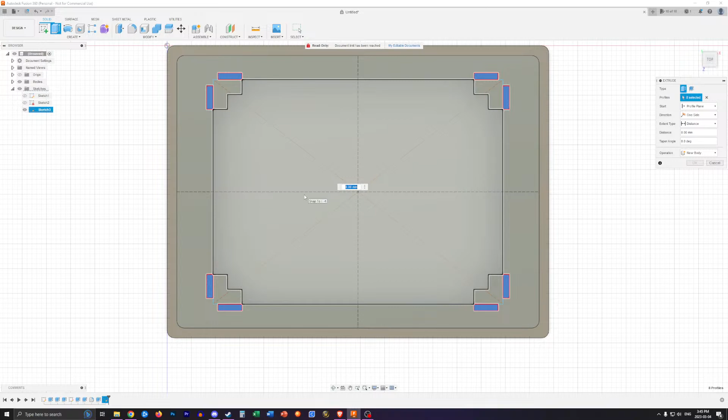Probably about 3 millimeters. Extrude, go 3. Typical PCB is 1.6 millimeters. Oh, you know what? They're probably going to be too close. Nah, screw it. Usually you want to give yourself 0.1 mils on both sides, but...

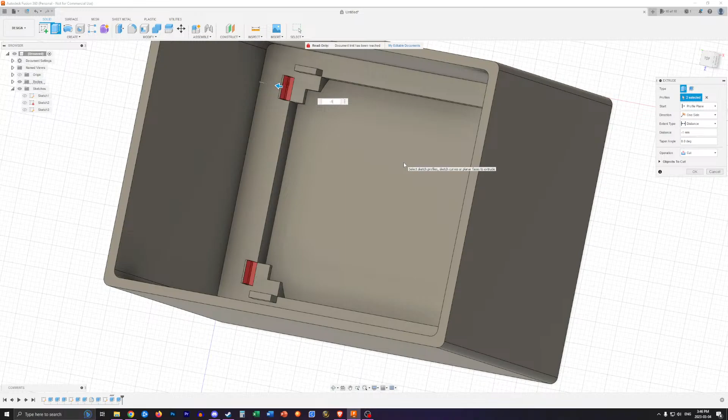Maybe I'll just extrude these back minus 0.1. And these guys as well, this and this. Extrude, let's go minus 0.1. What I learned from a live stream is that those dialog boxes I'm using to extrude, they take math equations as well. Negative 0.1. There we go.

Okay, and then I don't know if I can copy a feature from one to the other. I don't know. So let's try to create a sketch on here. This will be difficult to do.

All right, so take a line. You're gonna go up 2 mils, like so. 2-point rectangle. Actually, I guess since it's 3 mils, I could just go by 1 mil. 4x8 is good.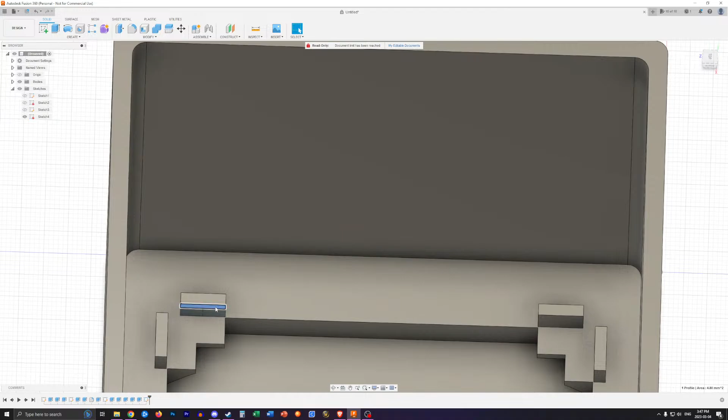That, and then this can be here. This is what I'm trying to do here. I'm gonna take this, gonna extrude it by 1 mil. Like so.

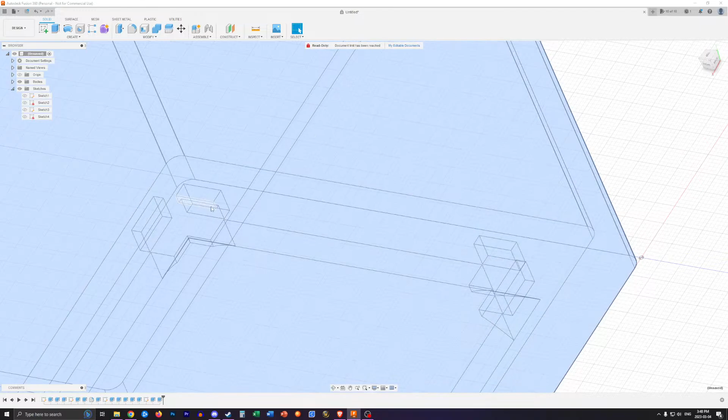And then just fill, actually it's 0.5 mil probably. 0.5. And then all I have to do is fill that bottom void there. I really need that wireframe view. So this, display settings, visual style, wireframe. There we go. Can I grab that wireframe piece underneath there? I can't, still can't grab it.

It's actually very difficult. You can slice through the view. Effects, environment, visual style. So there's... okay, that's the regular one. Oh, actually, no, it looks terrible.

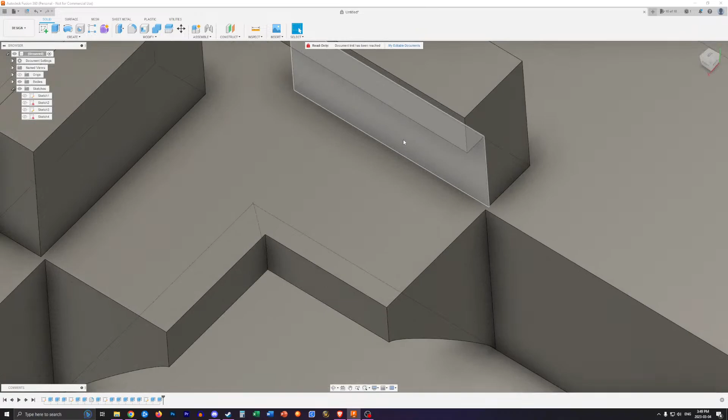Okay, hidden edges. Can I select the hidden edge? No. So, okay, that's the regular style, like that. I want that one line underneath. But there's a way to make a cut as well.

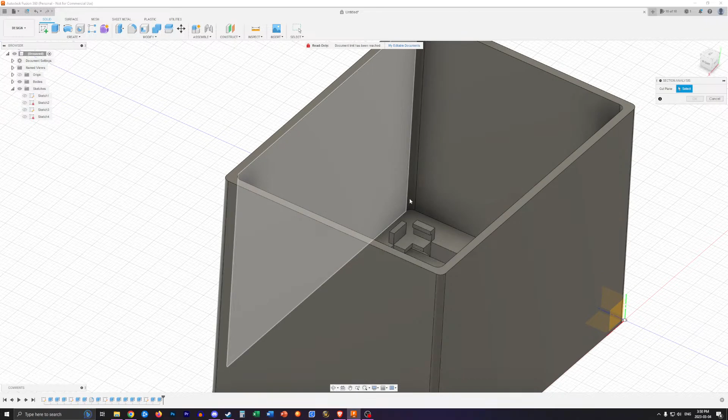Inspect. Section analysis, is that it? Can I reach it now? No. Well, I'll tell you what I can do. This is 59 or whatever. There we go, I can work on it and then make the walls after.

Oh, is there a way? Oh my God, there we go, I got it. All right, and then I want to do this, a chamfer, like that. And then if I chamfer this one, chamfer. I don't remember how much of a chamfer it was.

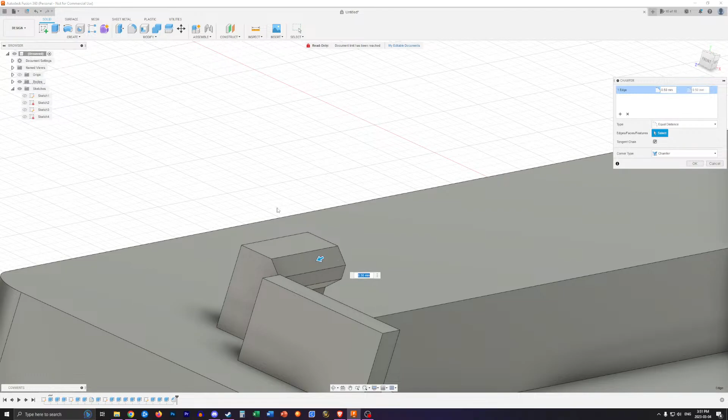Probably like that. So there we go, that'll clip it in. So now I want to take all this and duplicate it. So yeah, you can definitely do that. Maybe I'll just print this piece as well once it's done, just to make sure it clips in.

But yeah, that's the plan, is to do this with the clips, and then you can just clip your board in, and you don't have to use screws, because the less hardware people have to buy, the better, I think, at least.

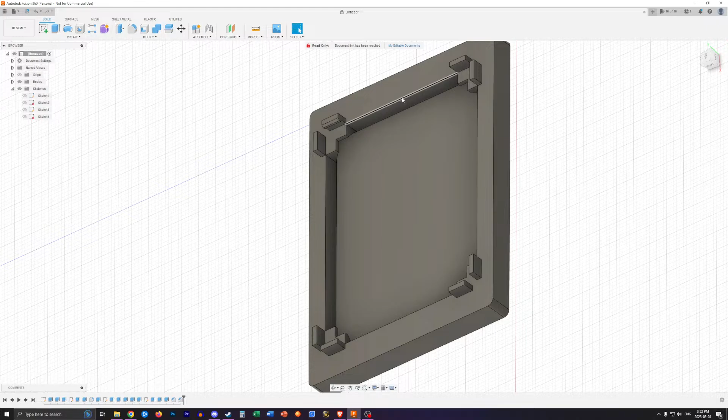I like that, I like that. I just don't feel like replicating it a couple times. Maybe if I slice it on this and then just duplicate it. Let's see, can I do that? I think you can do that. If you modify, right? Well, split body.

Body to split. Splitting tool would be this face. Okay, now this should be separate. Body 1, 2, 3, 4, 5, 7, 8, 9. So body 9. Okay, all right, so this body is body 2.

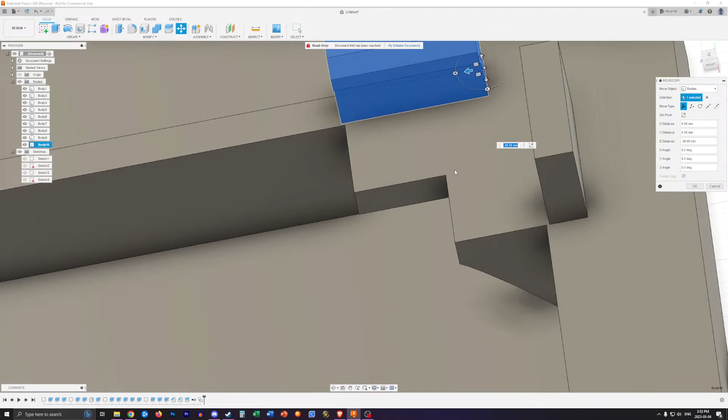If I delete it, oh, remove. Okay, so grab body 9, and then I move copy, create copy, and I can just shift it over here. There we go, no duplication for me.

Like that. Then I can delete all these bodies. Remove. Remove. Remove. Remove. This is a way better way to do things. Remove, and one has to stay.

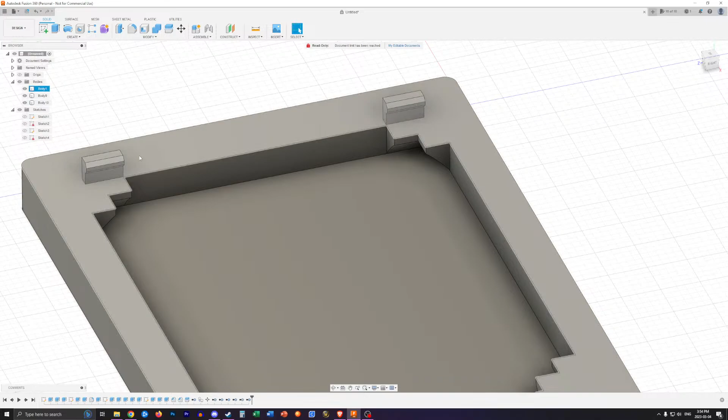Okay, so if I grab body 9 and 10 and I go move copy, I'm going to create copy, move them forward till they're in the right spot. Okay, whatever, and I flip them 90 degrees or 180 degrees. Move them this way.

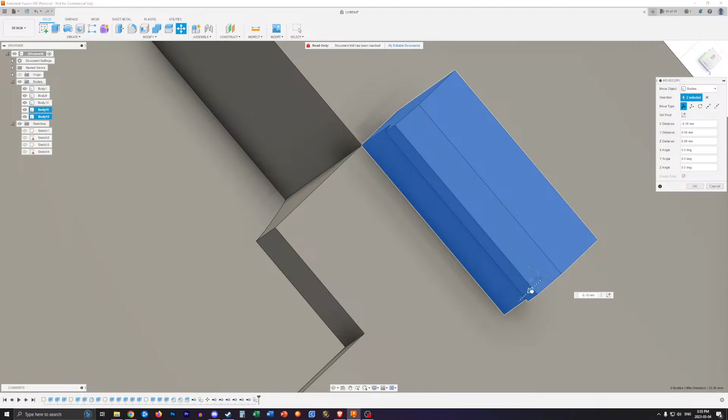I'm almost done anyways, Franco. Okay, still need to get this enough space. That's good. This, and then another 0.1. That should be good there.

Make sure the other side is good. Yep. There we go.

Take body 12, we're going to move copy. Create a copy, I'm going to flip it 90 degrees, the other way. We're going to move it into place, just so it's lined up here. Like that, line it up here, and another 0.1. Like so, and then we're going to move copy this.

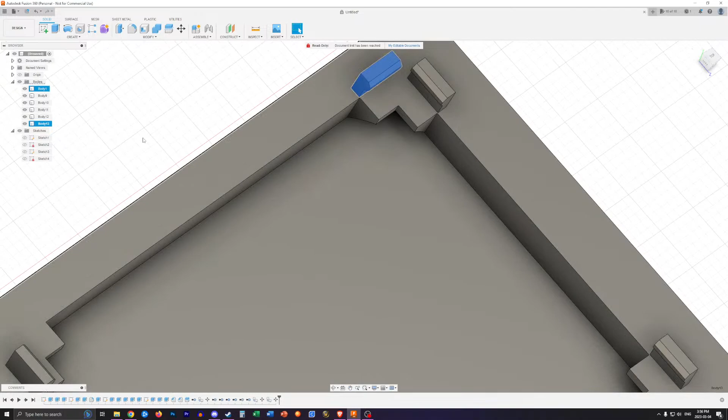Look at these skills. That's good and lined up.

Now we need 14 and 13. We're going to move, create copy, and we're going to rotate it 180 degrees. We're going to move them into place like that. More, and then we need to line them up this way, and then another 0.1. There we go.

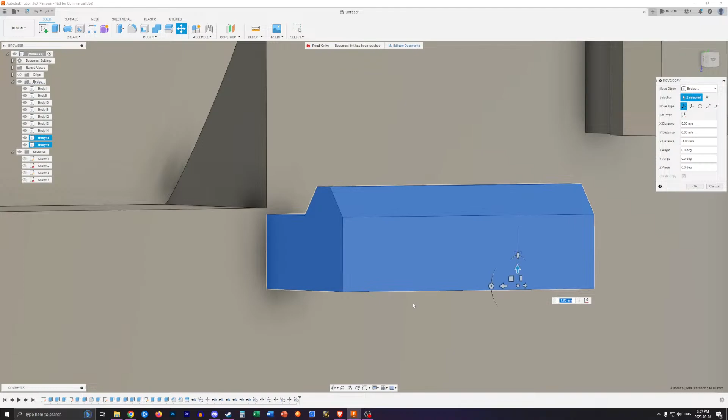That was much easier. All right, I think I'm going to end it here because it is 4 o'clock. I'm going to eat at some point. But yeah, I'll end it here, and now I'll print this.